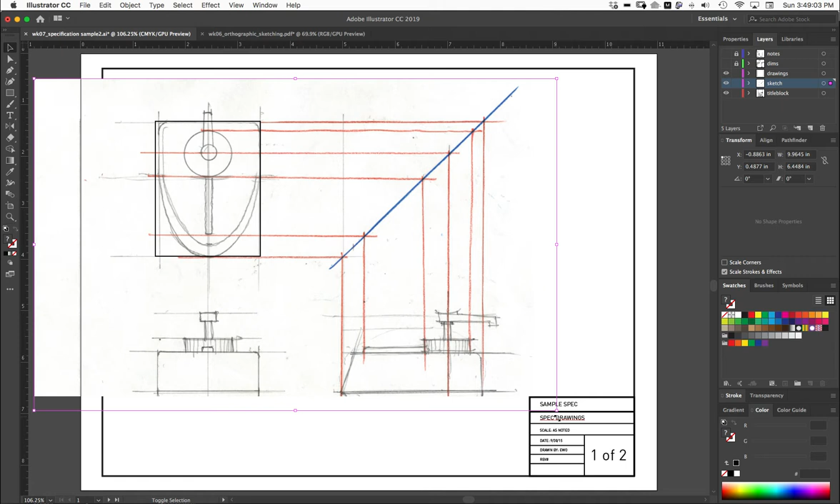I'm going to select the sketch, hold down the shift key, and scale up. That constrains it. I'll use the arrows to nudge it, scale it up again holding down shift, a bit more... pretty close, close enough for this.

Next thing I'll do is get rid of this rectangle first. Then I'm going to lock the sketch layer because I'm just using it as reference, and I'm going to draw on the drawings layer.

This is a symmetrical object. Even just looking at the sketch, I can see I'm not quite symmetrical in my drawing, but I want it to be symmetrical. So I'm just going to draw half of the shape, and then I'll create a copy and connect them.

I'm going to take the pen tool and start up at the top. You hold down shift whenever you have a purely horizontal or purely vertical line. For this point I'm going to click and drag a little bit to add the Bezier handles. Both places, you want them to be as symmetrical as possible. I'm still holding down shift, and I want to add a handle here even though there's no curve, because I want the curve to line in basically from the straight line into a curved face. It's always good to have a handle, otherwise you get a little bit of a corner there.

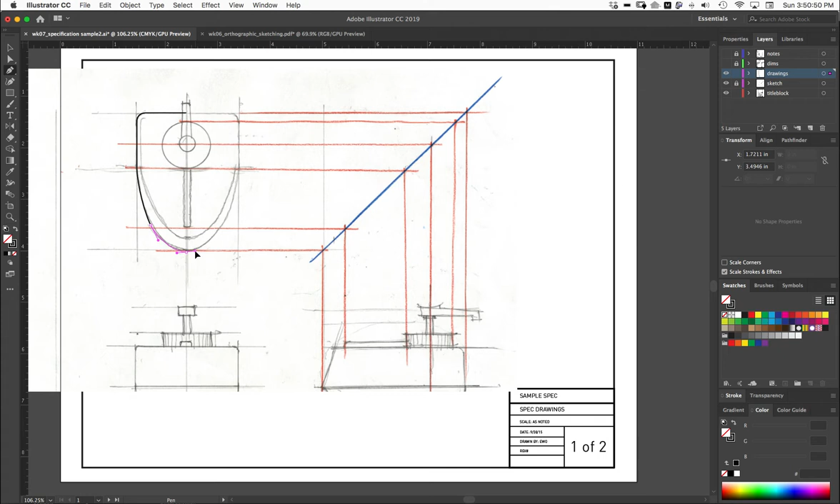I'm going to add another handle here in the middle and finish. You can see I'm getting a little cue where it's lining up, and I'm going to add a handle here, and hold down shift again so the handles are completely horizontal. I'm going to let go, hit escape, and now I have half a shape here.

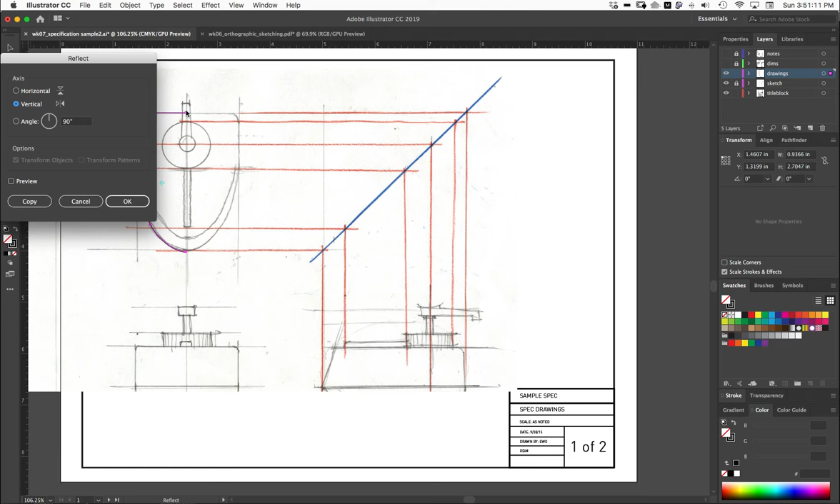Now if I go to the reflect tool, double click on it, make sure it's vertical because I want it to reflect off the vertical axis. Click copy—that creates a duplicate of it. And I line these two up.

I can zoom in here and make sure, with the black arrow, that I'm completely lining up to get the intersect cue. You can also toggle Command Y, which gets rid of all the artwork, and all you see is the line.

So this looks good. Then I take the white arrow, because now I want to join these two, and select those two endpoints—you can see all the other endpoints are white. I'm going to go to Object, Path, Join, or Command J. Zoom out, zoom in here, use the white arrow again, go Command J. So now this is one shape.

So that's basically creating a reflected image, so I have a symmetrical object. Now I can basically go through and do that for the rest of this.

The other thing I can do is, for a perfect circle, I wouldn't want to create a reflection. I'll just draw a circle there, but I want to make sure it's centered. So I can either center them afterwards, or I can create a guide now that I see the center here. Okay, so now I have a guide here.

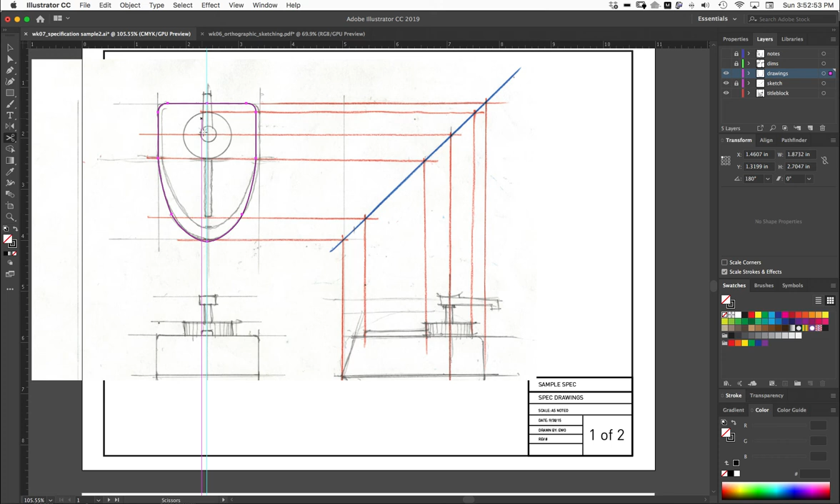Then I can take the ellipse tool, basically line it up. Holding down the Option key means it draws from the center instead of from the upper left corner to the lower right. And I get it to the size I want. You can see, again, my sketch is just a sketch.

I can look at the transform tool and see it's 0.9 inches, which is kind of an odd measurement, so I'm going to make it 1 inch. Actually, let's do this first: this tells it the reference point it transforms from, and we want it to grow from the center because we centered it, so just select that first. Now it'll increase in size directly from the center, and I go 1, hit tab, 1. Okay, so now it's centered. We can verify—yep, okay.

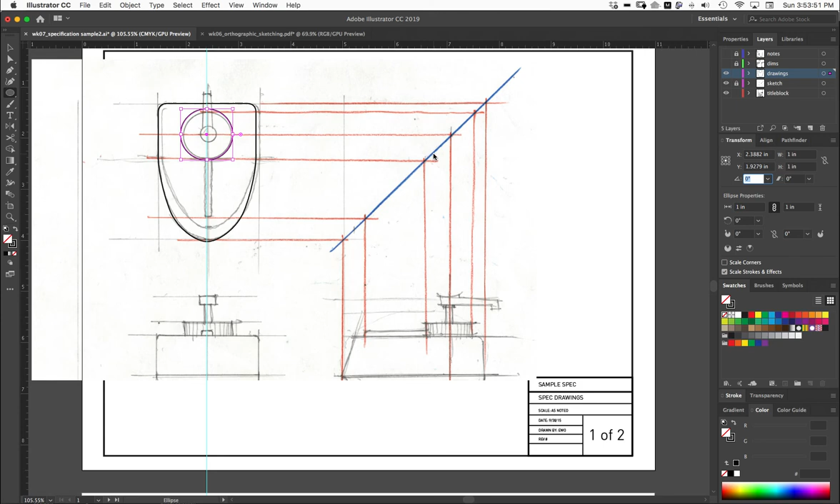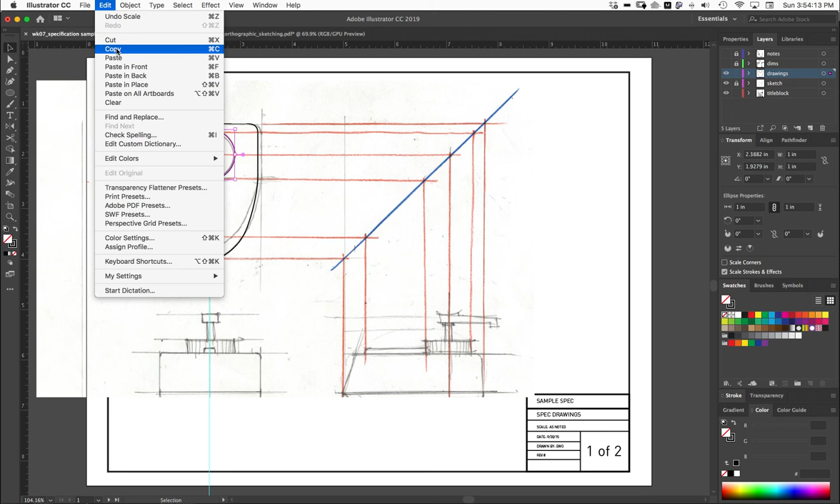And then if we want to create another circle, we can edit, copy, edit, paste in front. That makes an exact scaled object, so I've got a copy sitting right on top of the other copy.

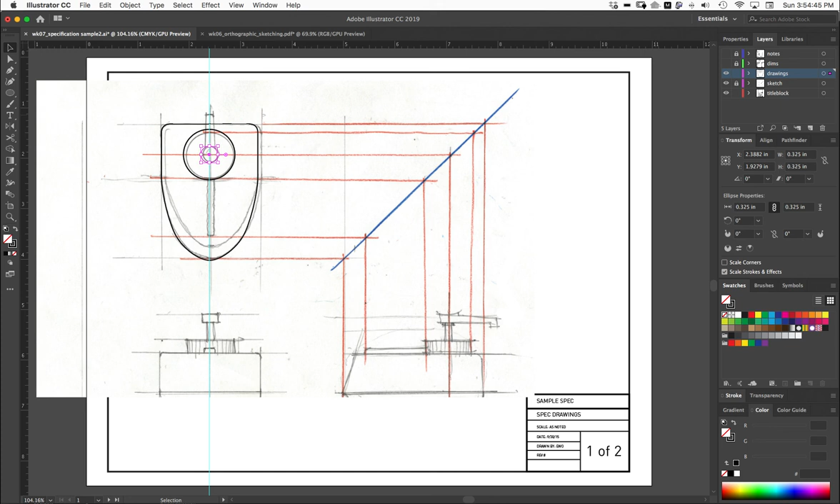Then if I hold down Option again and Shift to constrain it, now I can scale down and it'll stay centered right on the first one. Then I can look at the size and say, okay, so 0.325 is 3/8, so that means it would be 3/4, which is again a more regular size.

I'm also noticing that when I scaled it down, it scaled the strokes, which means scale, stroke, and effects is on. So if I select that and go to scale—just double click—this is where you can turn this off. Turn that off, leave it at 100%. Now it'll go to default.

Then I can select all of these and set them all to the same size despite them having been scaled up and down, because you want the same line weight for everything. So there's drawing symmetrical objects. If we turn off the sketch layer, we can see it's looking pretty good.